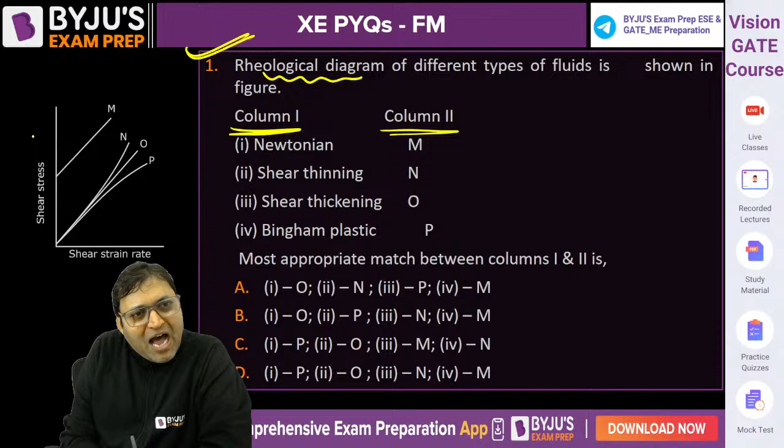There was a question asked regarding the rheological behavior of fluid. The rheological diagram of different fluids is shown in the figure. Column 1 is the type of fluid, column 2 is the graph. For Newtonian fluid, the graph is between shear stress and rate of angular deformation or strain rate, d theta by dt. For Newtonian fluid, tau is directly proportional to d theta by dt, and the slope of the curve will always be the viscosity of the fluid. Viscosity tells us whether the fluid is thick or thin - that's the thickness of the fluid. So for Newtonian fluid, since shear stress is directly proportional to rate of angular deformation, it will be a straight line. O is the Newtonian fluid.

O is Newtonian. Then shear thinning, whose slope decreases - thinning means the fluid becomes thin as viscosity decreases. So P will be the shear thinning fluid, whose viscosity or slope decreases. Shear thinning fluid is also known as pseudoplastic.

Then comes shear thickening - when the fluid becomes thick, the viscosity increases, and when viscosity increases, the slope increases. So N is shear thickening. Shear thickening fluids are also known as dilatant. And Bingham plastic is ideal plastic whose viscosity is constant, but there is a threshold shear stress required for the flow. So the order is O, P, N, M - B is the correct answer.

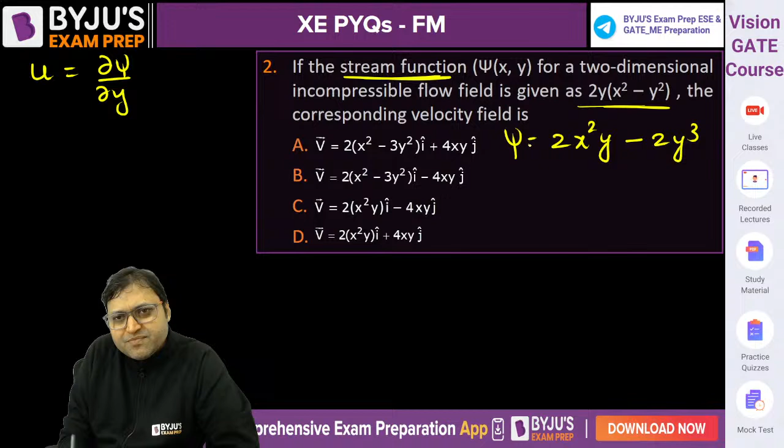If the stream function for a 2D incompressible fluid flow is given by this expression, find the corresponding velocity field. The velocity in x direction is del psi by del y. Can we write it as 2x square into y minus 2y cube? This is the expression, so del psi by del y is equal to 2x square minus 6y square.

V is equal to minus of del psi by del x, so it will be minus 4xy. That's it - find U and V. The velocity vector is equal to U i cap plus V j cap. Put the values of U and V: 2x square minus 6y square, or we can write it as 2x square minus 3y square i cap minus 4xy j cap. What is the answer?

Isn't it B again? Is it B again? B will be the answer, right? B will be the answer. Let us move to the next one.

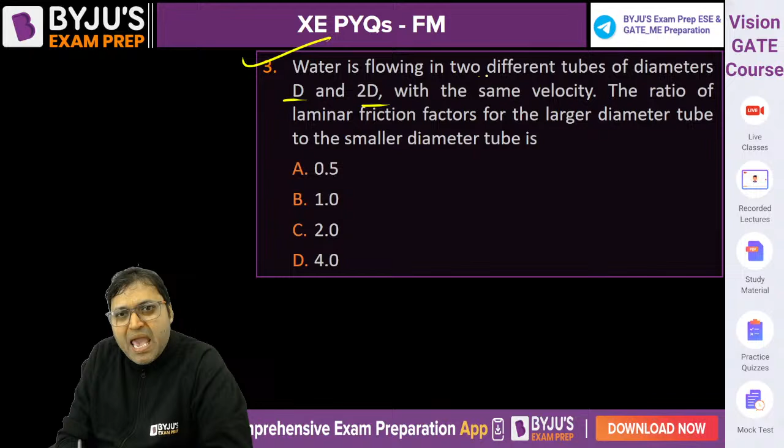Question number 3: water is flowing in two different tubes of diameter d and 2d with the same velocity. Here there is a catch - the velocity is constant, and the flow is laminar. Find the ratio of Darcy friction factor for the larger diameter tube to the smaller diameter tube. We need to develop a relation between friction factor and diameter.

For laminar flow, we know the friction factor is given by 64 by Reynolds number. And what is the Reynolds number? Reynolds number is rho into V into d by mu, or we can call it V into d by kinematic viscosity. When the velocity is constant, Reynolds number is directly proportional to diameter. So if we put it here, friction factor is inversely proportional to diameter.

That is the relation. The friction factor for the larger diameter to the smaller diameter, so F1 by F2 is equal to D2 by D1. Larger diameter is F2, this is D1, this is D2. So F2 by F1 is equal to D1 by D2, that is 1 by 2 will be the answer. It is 1 by 2, 0.5 will be the correct answer for this one, option A.

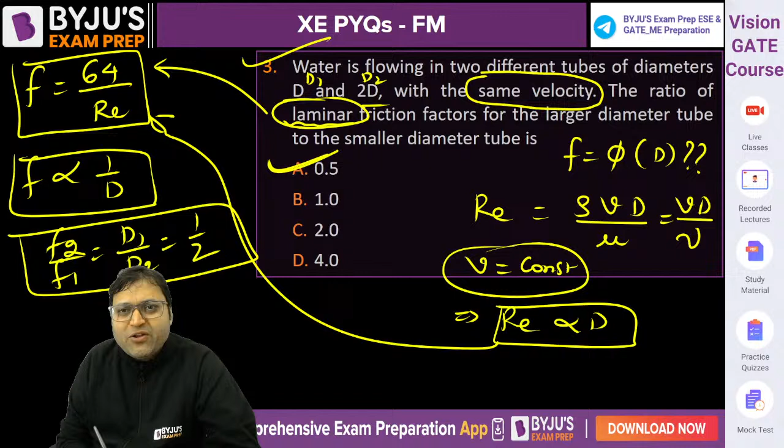If the discharge would have been constant, try to understand, if the question would have given constant discharge rather than constant velocity. If Q is equal to constant, then velocity is inversely proportional to d square. And if velocity is inversely proportional to d square, Reynolds number is directly proportional to velocity into diameter, so Reynolds number is inversely proportional to diameter. And if Reynolds number is inversely proportional to diameter, then friction factor would have been directly proportional to diameter. So in that case F2 by F1 would have been D2 by D1, so it would have been 2. If the discharge would have been constant, then the answer would have been C.

For Q is equal to constant, answer is C. For velocity is constant, answer is A. Do not commit these type of mistakes. Whenever we are supposed to develop a relation between any two parameters, the constant terms are removed from the relation. The variable terms are taken into consideration for developing the correct relation. Sometimes the velocity could have been given as constant, sometimes the discharge would have been given constant.

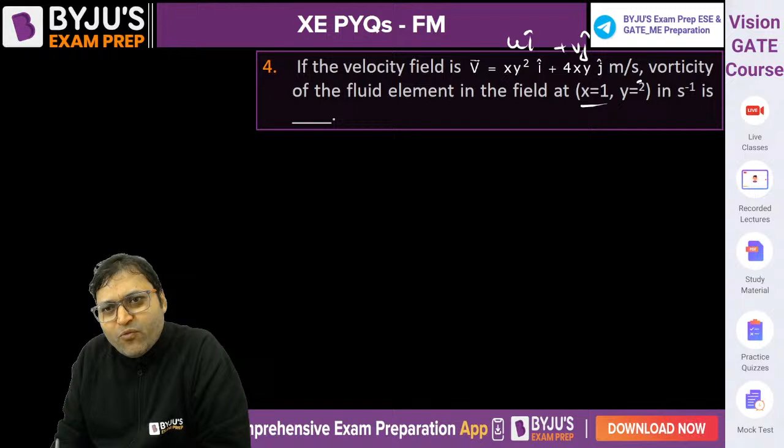The next one: if the velocity field is given by this expression, U i cap plus V j cap, find the vorticity of the fluid element in the field at x is equal to 1 and y is equal to 2. What is the vorticity about z axis? So del v by del x minus del u by del y, that will be the vorticity. What is u? x into y square. What is v? 4xy. So put the values: del v by del x is 4y, minus del u by del y which is 2xy. At x is equal to 1 and y is equal to 2, vorticity is equal to 4 into 2 minus 2 into 1 into 2, so 8 minus 4, that is 4 second inverse. The unit of vorticity is second inverse. The answer will be 4.

It will be 4, right? Isn't it 4? There is a negative sign here, there should be a negative sign.

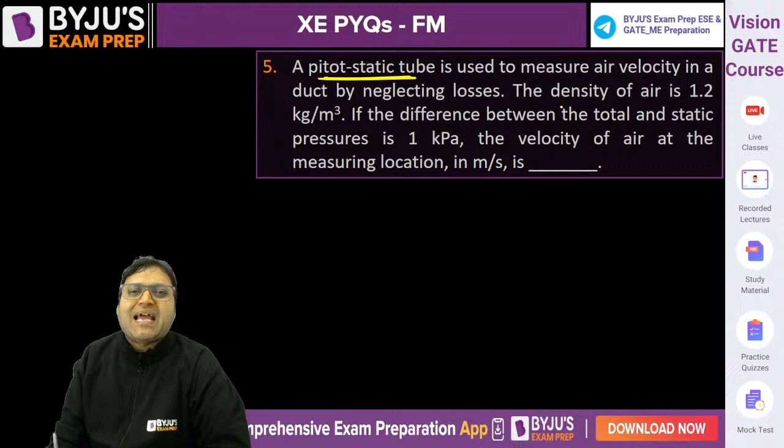Let us move to the next one. A pitot static tube is used to measure air velocity in a duct by neglecting the losses. It means coefficient of velocity will be taken as 1 and the losses are not considered. The density of air is 1.2 kg per meter cube. If the difference between the total and the static pressure - like this is the pitot tube, this is point 1, this is point 2. Point 2 is having total pressure, point 1 is having static pressure because the velocity is V1. What is the velocity of air at the measuring location?

V1 is equal to under root of 2gh, where H is P2 minus P1 by rho g. By applying the Bernoulli equation and pressure equation, we get this expression. The g and g get cancelled out. So under root of 2 into P2 minus P1, which is 1000 pascal (1 kilopascal is 1000 pascal), upon density 1.2. That is the velocity in meter per second. How much is the answer? 2000 divided by 1.2, take the square root of this. Are you getting 40.82 meter per second?

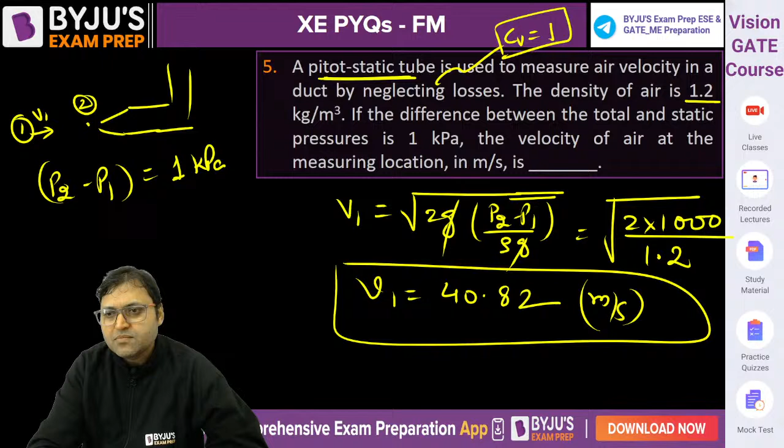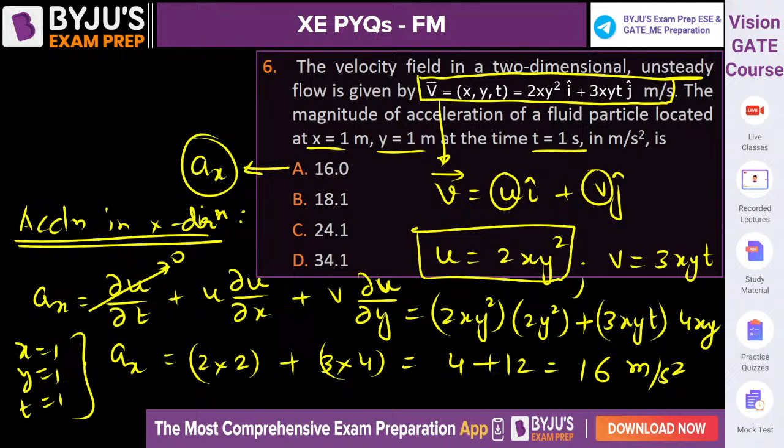Fluid machinery is not part of the engineering science syllabus. Fluid machinery will not be there. You should be happy that fluid machinery will not be there. But potential flow is there. Superposition of the potential flows, uniform flow, doublet, etc. A small topic is there, which is part of the syllabus.

Now, similarly, we can find out AY. If we compare, this is U i cap plus V j cap. So, U is equal to 2xy square and V is equal to 3xyt.

So, if we find out AY, acceleration in Y direction, calculate AY is equal to del V by del T, local acceleration, plus U into del V by del X. You should memorize the formula. Del V by del X plus V into del V by del Y.

V is a function of time, so del V by del T is 3xy, plus U, 2xy square into del V by del X, that is 3yt, plus V, that is 3xyt into del V by del Y, that is 3xt.

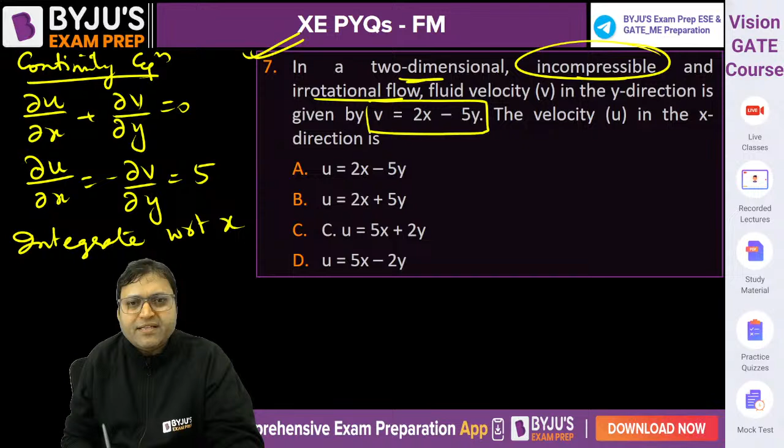Now, if we integrate this with respect to X, what do you get? Then U is equal to 5x plus a function of Y. Now, differentiate with respect to Y, then we will say del U by del Y is equal to f dash Y. This will give you the answer.

Del u by del y is f dash y. Now, to find out, this is equation number 1.

Also, the flow is irrotational. For irrotational flow,

Do you agree vorticity, that is del v by del x minus del u by del y, is equal to 0? Or we can say del u by del y is equal to del v by del x. What is del v by del x? That is 2. So this is equation number 2.

If you equate 1 and 2, from equations 1 and 2,

Which test are you talking about, Rocky?

From equation number 1 and 2.

Do you know that during the examination also you can select the sections out of the given sections, A to H, B to H? There are two sections you are supposed to select, and you can select after seeing the paper as well. Once you start solving a particular section, you can also deselect that section and select another one.

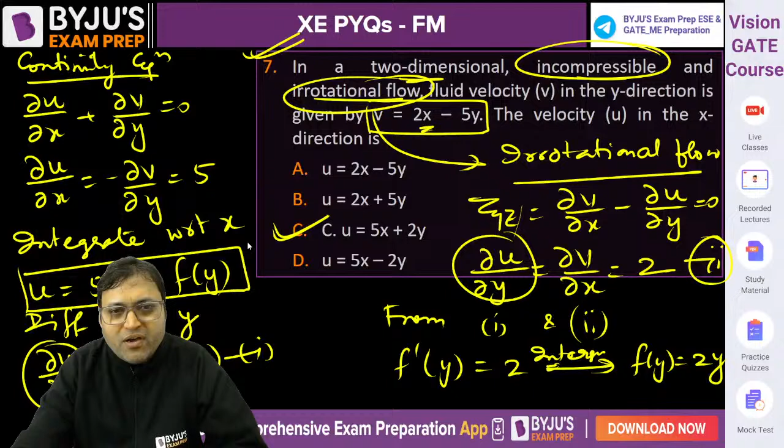Please try to revise one topic, that is potential flows. That is part of your engineering science fluid mechanics syllabus, and do not go for hydraulic machines. That is never asked in the engineering science paper. Don't revise or solve questions from hydraulic machines, but potential flow, normally theoretical questions are asked, so you do not have to worry much, but that is part of your engineering science syllabus.

The next question, let us move to the next one. Question number 8. Give it a try.

There is a water jet. The question is from the momentum equation. A water jet of 100 mm diameter, issuing out of a nozzle at a speed of 50. The diameter of the water jet is 100 mm, jet velocity is 50 meter per second. V, velocity of the jet, strikes the vane. Vane means the curved plate, and flows along it as shown in figure. This is how the fluid is flowing.

This is how the flow is flowing over the vane. The vane is attached to a cart, which is moving at a constant speed of 20 meter per second. What does that mean? It means the velocity of the vane is 20 meter per second. It means the blade is also moving. It is an example of a moving curved blade.

Whenever the blade is also moving or the plate is also moving, then we always talk about the relative velocity. We sit on the plate and write the momentum equation. I hope you remember the fact that because the flow becomes unsteady when the surface is moving or the control volume is moving, then the flow becomes unsteady. To make the flow steady, we sit on the control volume or the plate and write the momentum equation.

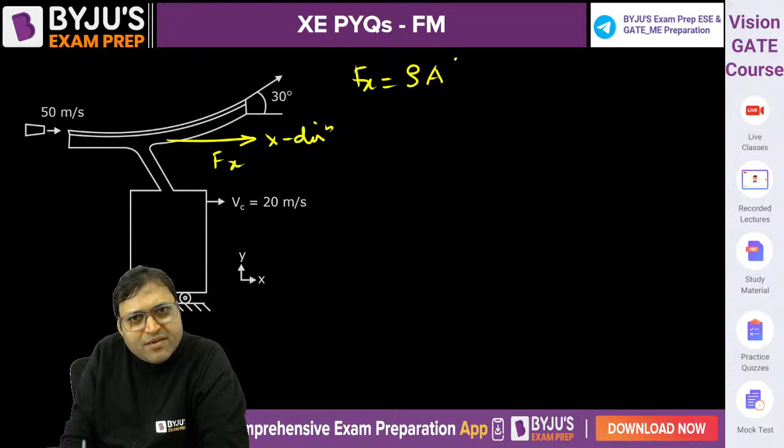density into discharge, mass flow rate rho into A into relative velocity. If you sit on this, which is moving with the velocity u, then the relative velocity of the fluid is v minus u, into force on the plate. So initial velocity minus final velocity in x direction. V minus u is the initial velocity, minus final velocity is v minus u cos 30.

This will give you the answer. It will be rho A into v minus u whole square into 1 minus cos 30. Put the values, you will get the answer. 10 to the power 3, pi by 4, d square. What is the diameter? Diameter 100 mm, 0.1 meter.

Into v minus u, 50 minus 20 whole square, into 1 minus cos 30, under root 3 by 2. What is the answer? What will be the answer? Can you solve it?

Are you getting 947 Newton something? Are you guys getting 947 Newton? Please check. Everybody please check in Newton. 1 minus root 3 by 2.

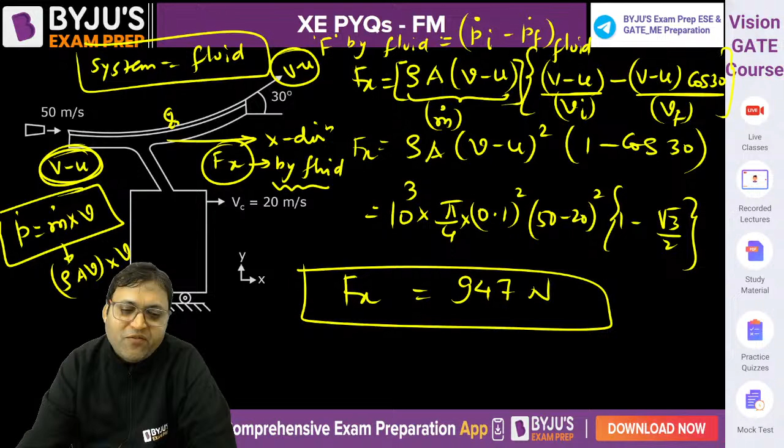Mass flow rate into change in velocity, I have written. But because the plate is moving, we consider the relative velocity, not the actual velocity. Relative velocity of the jet is V minus U, because both are moving in the same direction. If the plate were moving in the opposite direction to the flow, the relative velocity would have been V plus U.

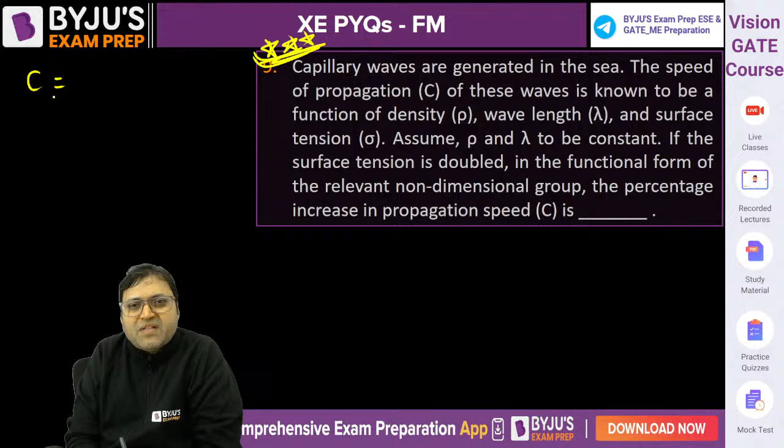The next one: capillary waves are generated in the sea. The speed of propagation of the waves, C, is known to be a function of density rho, wavelength lambda, and surface tension sigma. Assume rho and lambda to be constant. If the surface tension is doubled in the functional form of the relevant non-dimensional group, find the percentage increase in the propagation speed.

So the final speed is, let us say, C2, and initially C1, with sigma 2 becoming twice of sigma 1, that is given. So C2 minus C1 upon C1, into 100, will be the percentage change, or C2 by C1 minus 1, into 100.

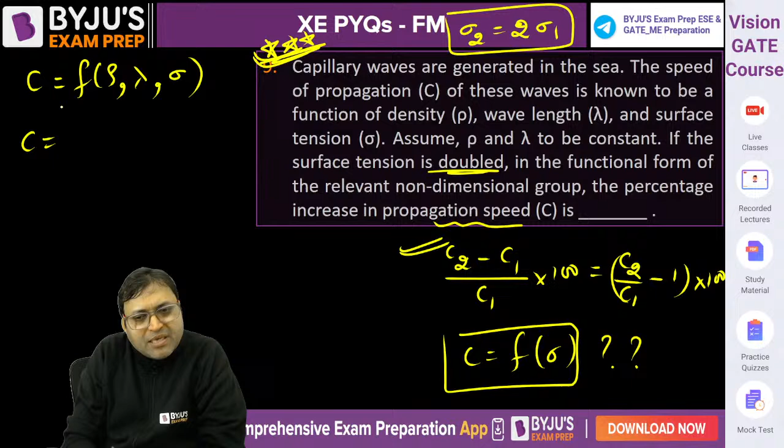So our objective is to develop a relation between C and sigma. This will give you the answer. So how to develop the relation between C and sigma? We can write C is equal to some constant into rho to the power A, lambda to the power B, and sigma to the power C.

Equate the dimensional formula. C is L1 T minus 1, meter per second, is equal to K, the constant parameter. Rho is M1 L minus 3 to the power A. Lambda is L1 to the power B. Sigma is Newton per meter, that is M1 T minus 2, the dimensional formula, to the power C.

Equate the powers on LHS and RHS. M to the power A plus C. Then L to the power minus 3A plus B. And T to the power minus 2C is equal to M0 L1 T minus 1. Now if we equate the powers, A plus C is equal to 0, one equation. Our objective is to find out this C, because both others are constant. A plus C is equal to 0, minus 3A plus B is equal to 1, and minus 2C is equal to minus 1. We are interested in this C only.

C is equal to 1 by 2. Yes or no? The value of C is equal to 1 by 2. So we can say this speed of propagation of wave is directly proportional to sigma to the power 1 by 2. That will be the relation.

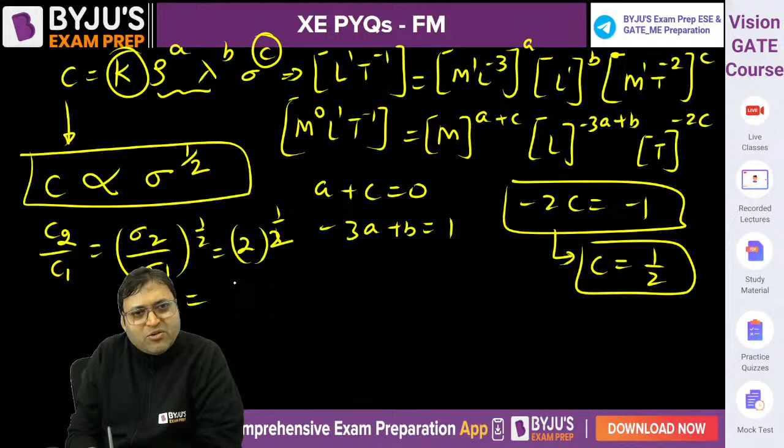So if we want to find out C2 by C1, then sigma 2 by sigma 1 to the power 1 by 2, and sigma 2 is 2, that is 2 to the power 1 by 2. What is 2 to the power 1 by 2? That is 1.414, root 2, 1.414, C2 by C1.

So if we get C2 by C1, put it in equation number 1. This is our equation number 1. Put the values in equation number 1. These type of questions are important nowadays. We will get C2 by C1 is 1.414. 1.414 minus 1 into 100, that is 41.4% will be the correct answer. It is around 41.4, which will be the right answer.

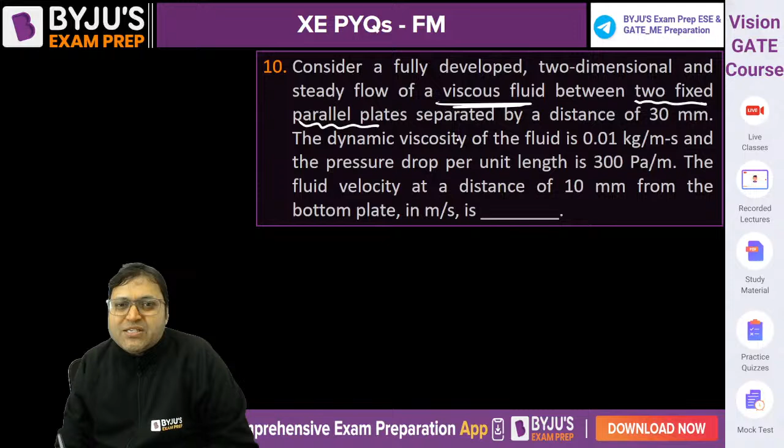Two fixed parallel plates. Revise all the formulas related to the parallel plates, separated by a distance of 30 mm. The dynamic viscosity of the fluid is given, and the pressure drop per unit length is given as 300, that is del P by del X.

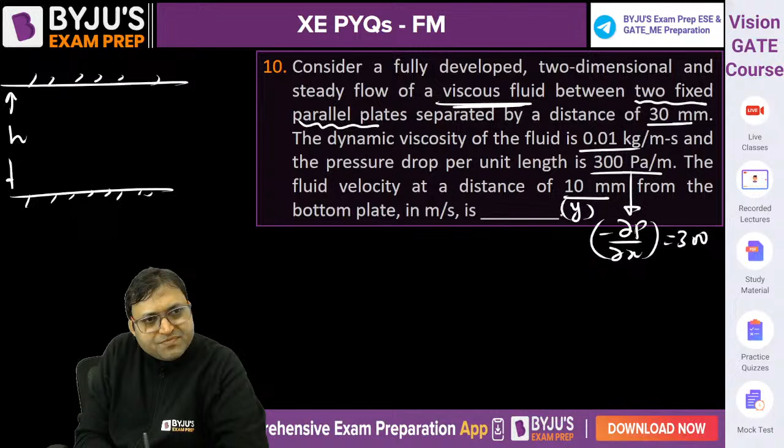300. The fluid velocity at a distance of 10 mm from the bottom plate is Y. There are two plates like this. The distance between the plates is H. This is Y is equal to 0, this is Y, this is Y is equal to H. So we need to find out.

The velocity is given by 1 by 2 mu, minus of del P by del X, into Hy minus Y square. If you remember this formula, what is the distance between them? That is H, H is given as 30. So 1 upon 2 into mu, 0.01, that is the dynamic viscosity, into 300, then Hy minus Y square.

H is 0.03, into Y, that is 10 mm, 0.01, minus Y square, 0.01 square. That will be the answer. Can you solve it?

0.03 into 0.01 minus 0.01 square, into 300, divided by 0.02. 3 will be the correct answer. The velocity is 3. The velocity is given by 3.

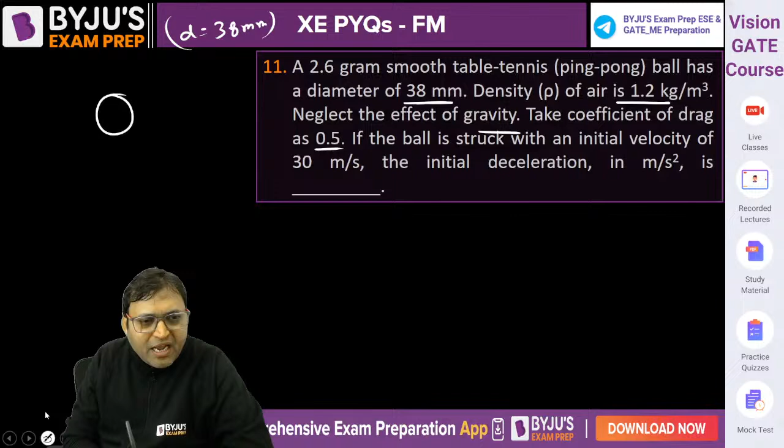Question number 11, next one. A 2.6 gram smooth table tennis ball has a diameter of 38 mm. There is a ball having a diameter of 38 millimeter, that is the diameter. Density of air is 1.2 kg per meter cube. Neglect the effect of gravity. Take coefficient of drag as 0.5, average drag coefficient. If the ball is struck with an initial velocity of 30 meter per second, that is u.

This is air, let us say. The initial deceleration is caused by a drag force acting by the air in the direction opposite to the motion. So this mass into acceleration is equal to Fd, isn't it?

That is the deceleration because it is acting in opposite direction, so acceleration is decreasing, that is the retardation. Initial velocity is u, after some time it will stop. So we can say m into a is equal to CD into projected area into rho u square by 2.

What is the mass? 2.6 gram, that is 2.6 into 10 to the power minus 3 kg into acceleration. CD is 0.5. What is the projected area? Projected area will be the area of the circle. For a sphere, the projected area will be the circle.

It is the projected area, it will not be the area of the sphere, it must be the projected area. Pi by 4 d square, the diameter is 38 mm, 0.038 square, into rho, what is the density? 1.2 divided by 2 into u square. What is the initial velocity? 30 meter per second.

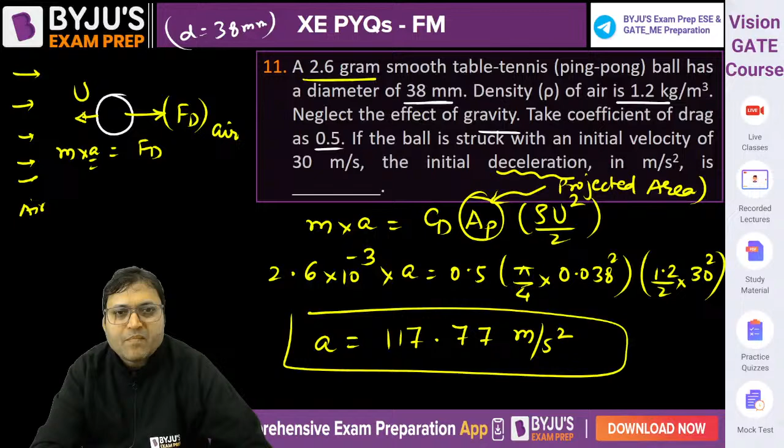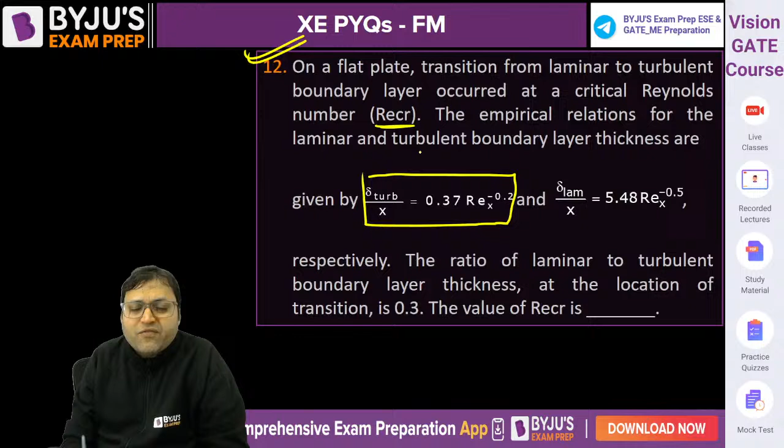The next one, over a flat plate, transition from laminar to turbulent boundary layer occurred at a critical Reynolds number. The transition of boundary from laminar to turbulent takes place at the critical value of Reynolds number. The empirical relation for the laminar and turbulent boundary layer thicknesses are given by, for turbulent this is given by this expression, that is what we know: Re to the power 1 by 5.

Rex to the power minus 0.2, that is in the denominator Re to the power 0.2, and 0.2 is 1 by 5. And for laminar it is given by this expression, that is Reynolds number to the power 1 by 2 in the denominator, right? The ratio of laminar to turbulent boundary layer thicknesses at the location of transition is 0.3.

So delta laminar to delta turbulent is given as 0.3. We need to find out the value of Reynolds number. So delta laminar, if we put the value, we will write 5.48 into Reynolds number to the power minus 0.5 upon x, and delta turbulent we can write 0.37 into Reynolds number to the power minus 0.2 upon x. X and x are getting cancelled out, so that is equal to 0.3. We can easily find out the value of Reynolds number. Can't you find out the value of Reynolds number?

5.48 upon 0.37 into 1 by Reynolds number to the power 0.3 is equal to 0.3, isn't it? Sorry, it is minus 0.2 plus 0.5, that is 0.3. So can you find out the Reynolds number? Reynolds number to the power 0.3 is equal to 5.48 upon 0.37 into 0.3.

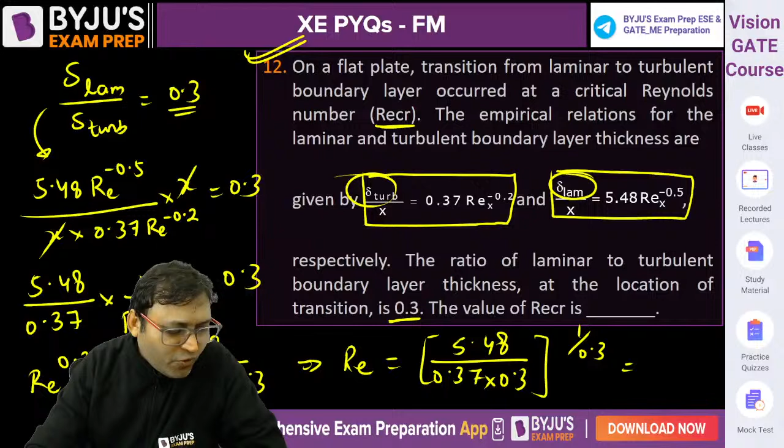The value will be 5.48 divided by 0.37 divided by 0.3, to the power 1 divided by 0.3, that is 441,426.7. That will be the value. Yes, that is correct, Aniket, that will be the answer.

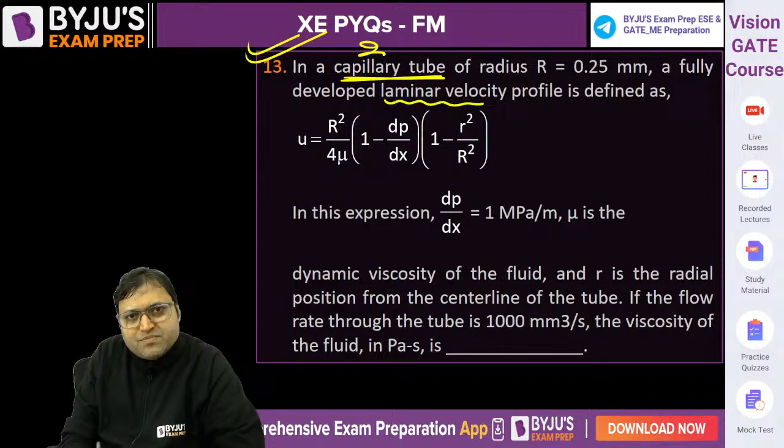The next one, question number 13, that is laminar flow in a pipe or in a tube, in the capillary tube. It is internal flow, it is an example of internal flow. In the capillary tube of radius 0.25 millimeter, a fully developed laminar velocity profile is defined. They might not have given you this.

You must remember U maximum 1 minus R square by capital R square, that is the velocity profile, parabolic velocity profile for laminar flow in a pipe, where dP by dx is given as 1 megapascal per meter. This was done a bit wrong, wasn't it?

It is not 1 minus del P by del x. Is it 1 minus del P by del x? There is a mistake. It is not 1 minus, it is minus del P by del x. Yes, it will be minus del P by del X.

This is U maximum, this is the maximum velocity. Mu is the dynamic viscosity and R is the radial position from the center line of the tube. If the flow rate through the tube is 1000 millimeter cube per second, find the viscosity of the fluid in Pascal second. It means dynamic viscosity is asked.

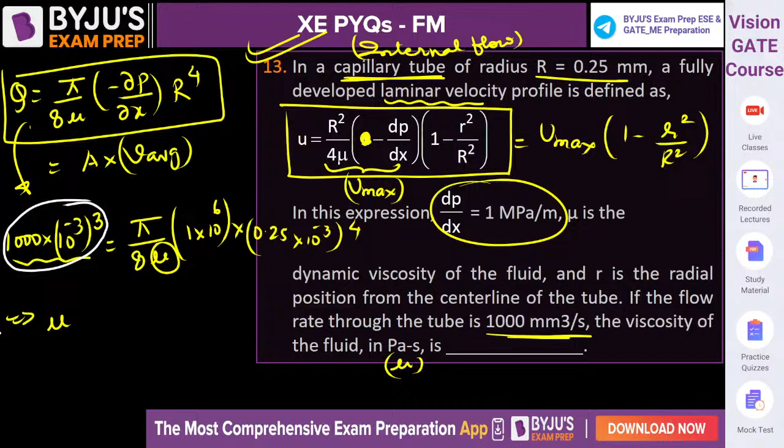Please do the calculation correctly for this term. Can we say this term is 10 to the power minus 6, and this is also 10 to the power minus 6, here also 10 to the power minus 6, so this will get cancelled out like this. So mu is equal to pi by 8 into 0.25 to the power 4. That will be your answer, Pascal second, isn't it?

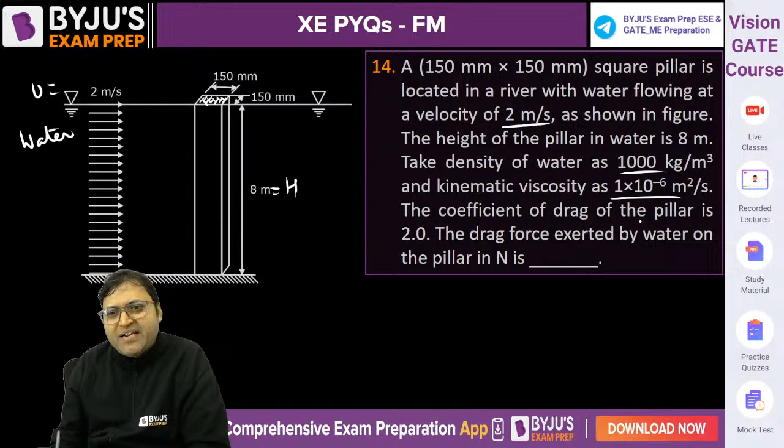A 150 by 150 square pillar is located in a river with water flowing at a velocity of 2 meter per second. The fluid is water, the height of the pillar in water is 8 meter, the density of water is 1000, kinematic viscosity is 10 to the power minus 6, and the coefficient of drag of the pillar is 2, CD. Find the drag force exerted by water on the pillar. Simple: drag force is equal to CD into the projected area into rho u square by 2.

What is the projected area? Projected area is the frontal area, this will be the projected area. So that will be 8 meter multiplied by 150 mm, that is 0.15 meter. Projected area is this. So CD, 2, into 8 into 0.15 into 10 to the power 3 into u square, that is 2 square, upon 2.

Convert 150 into meter, so 0.15. The answer you will get in Newton. So 16 into 16,000 into 0.5, sorry, 32,000 into 0.15, 4,800 will be the answer. 4,800 Newton will be the drag force.

Question number 15, the next one. I will discuss 25 questions from BYJU'S. Let us solve question number 15.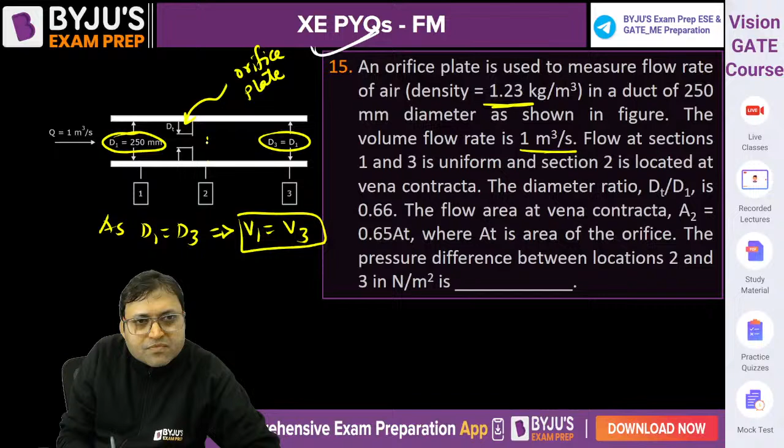According to continuity equation, flow at section 1 and 3 is uniform and section 2 is located at vena contracta. This is section 2, which is at vena contracta. This is point 2, so the fluid will be moving like this. This is how the fluid flow will take place.

The diameter ratio dt, the diameter of the orifice upon d1, is 0.66. The flow area at vena contracta, that is A2, is 0.65 AT. So A2 is equal to 0.65 AT. We can say pi by 4 d2 square is equal to 0.65 into pi by 4 dt square, because the pipe is circular. So d2 square is equal to 0.65 dt square.

Now the question is to find the pressure difference between location 2 and location 3. 2 is this point, 3 is this point. We need to find out the pressure difference between 2 and 3. So how to solve it? Apply Bernoulli equation between points 2 and 3.

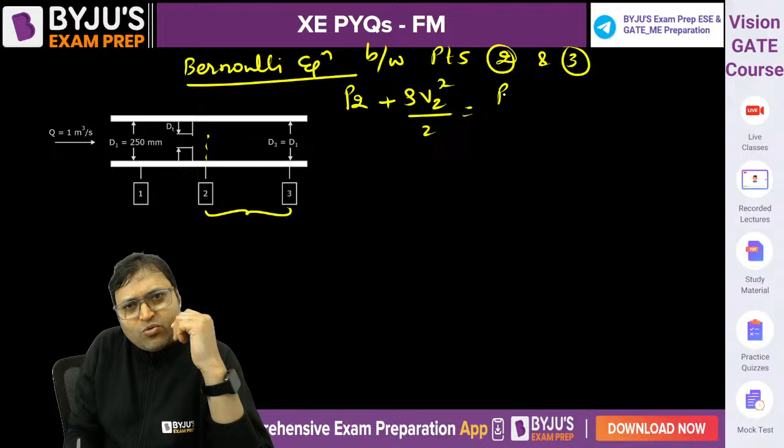We can say P2 plus rho V2 square by 2 is equal to P3 plus rho V3 square by 2, in terms of pressure. Z2 is equal to Z3, there is no change in potential energy, since they are very, very close to each other points. So the question is to find out the pressure difference between 2 and 3.

So P3 minus P2 is equal to rho by 2 into V2 square minus V3 square. And V3 can be written as V1, isn't it? V3 is equal to V1. So this becomes P3 minus P2 is equal to rho by 2 into V2 square minus V1 square.

And the flow rate is 1 meter cube per second, so we can find out the value of V1. How to find out the value of V2? If we take V1 square common, can you solve it?

If we take rho by 2 V1 square common, then it will be V2 by V1 whole square minus 1. And V2 by V1 is equal to A1 by A2. So we can write P3 minus P2 is equal to rho by 2 into V1 square, then A1 by A2 whole square minus 1.

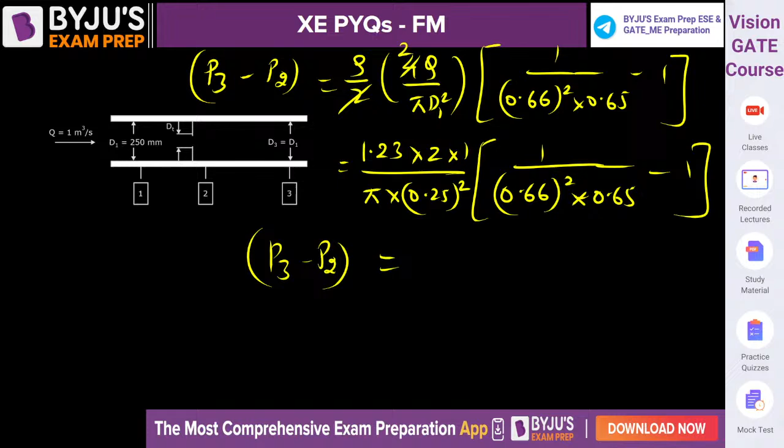There is some mistake in the question. An orifice plate is used to measure the flow rate of air in a duct of 250 mm. The volume flow rate is 1 meter cube. So from here we can find out V1. V1 is equal to 4q by pi d1 square. What is V1? 4 divided by pi divided by d1 square, 0.25 square, 20.37. V1 is 20.37.

20.37. And V3 is also same as V1 because D3 is equal to D1. Yes, and the flow rate at section 1 and 3 is uniform. dt by d1 is 0.66. So we can find out dt, this diameter.

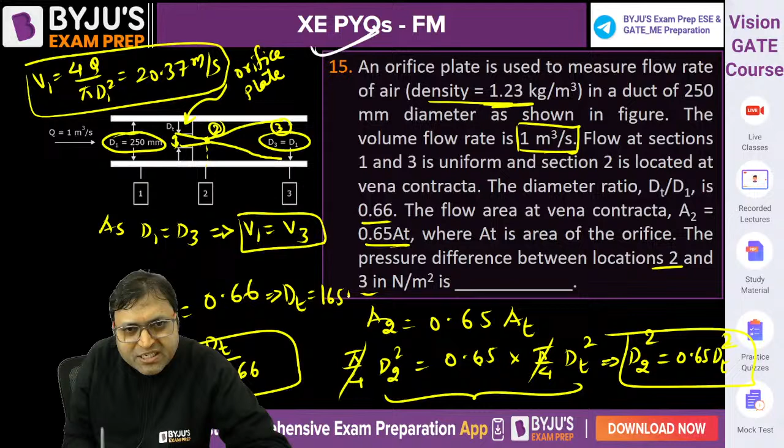We need to find out d2. How can you find out d2? d2 square is equal to 0.65 dt square. And what is dt? From here we can find dt. dt is equal to d1 into 0.66. So 0.66 into d1, 250, gives 165 mm. dt will be 165 mm.

And d2 will be equal to... a2 is equal to 0.65 at, so d2 square is 0.65 dt square. So d2 is equal to under root of 0.65 into dt, into under root of 0.65, 133.02. So d2 will be equal to 133.027. So these are the values.

So if we put the values directly here: rho by 2 into v2 square minus v1 square, rho by 2 v1 square into v2 by v1 whole square, which is a1 by a2, d1 by d2 whole square minus 1. So it will be rho by 2 v1 square.

What is the value? Rho by 2 v1 square: 1.23 divided by 2 into 20.37 square, into d1 square by d2 square minus 1. d1 square is 250 square. 250 square upon d2. What is d2? d2 had been calculated as 133.027.

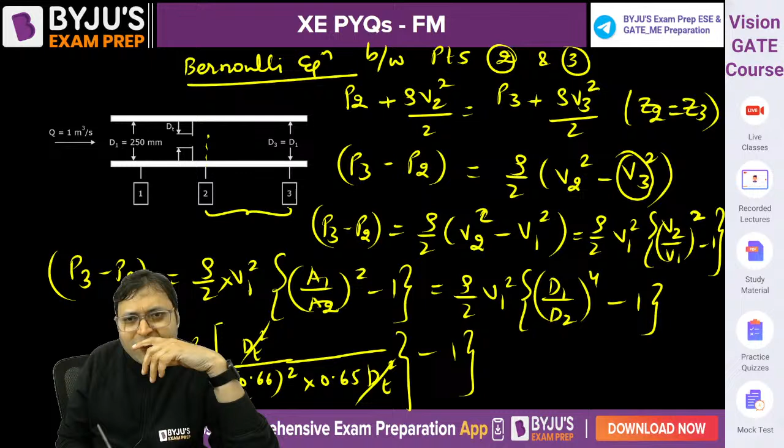V2 square minus V1 square over 2 v1 square. It should have been to the power 4. Here I had committed the mistake. It should have been the power 4, isn't it? It should have been power 4, because A1 by A2 whole square is D1 by D2 to the power 4. Are you getting it? Here also it should have been power 4.

Now what will be the answer? It should have been power 4. Yes or no? No need to write this, just calculate D1 and D2 to the power 4. Now what will be the answer? 250 divided by 133.027 to the power 4, minus 1, into 1.23 into 20.37 square divided by 2.

2927.9, it is around 2928 Newton per meter square will be the answer. The final answer, the correct answer will be 2928. Yes, that is correct, it is around 2928. That will be the answer.

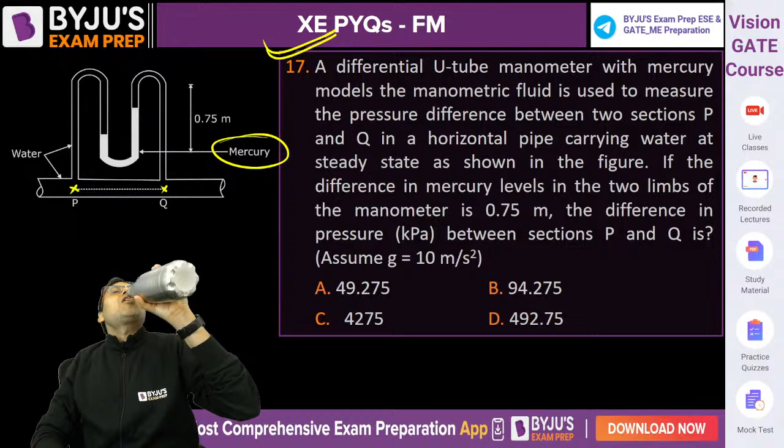If the difference in mercury level is given as 0.75, the difference in mercury level is, this is 0.7, this is 0.75.

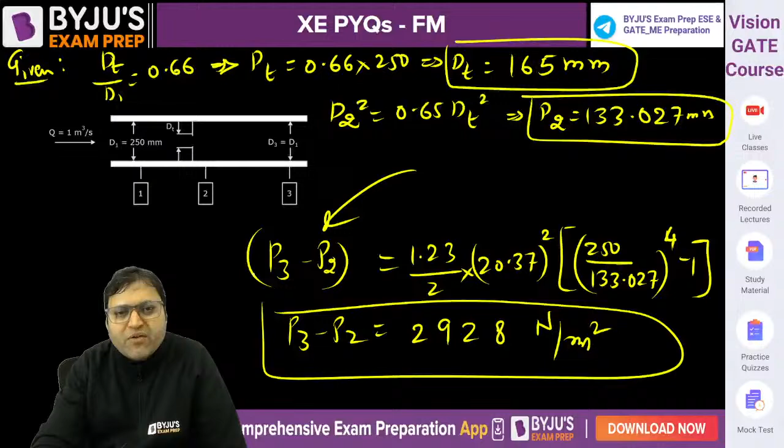That is an incorrect answer. The answer given is incorrect. The correct answer should be 2927, 2928.

Next question: we need to find the difference in pressure in kilopascal between section P and Q. Assume acceleration due to gravity is 10 meter per second square. So find out the pressure difference in kilopascal.

So if we write the pressure equation, can you write it? Start from point P, PP. Then we are moving in the upward direction up to this height. Let me call this height H.

PP minus, density of water. We will write the pressure equation in kilopascal only. So PP is the pressure at point P in kilopascal, minus rho of water, which is 1000 kg per meter cube, but we need it in kilopascal so divide by 1000. So that's G, that is 10 into H.

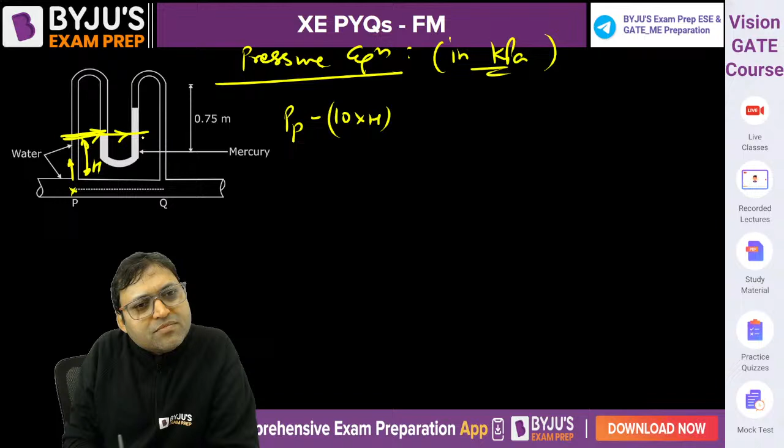Then we can jump from here to here, then again from here to here. We are here, then again moving upward, minus rho GH, 13.6 into G into 0.75.

We are here, now traveling downward, plus, and we are traveling in water. Then 1 into 10 into 0.75 plus H is equal to PQ. This is the pressure equation, equal to PQ.

So this minus 10 into H will get cancelled out with the 10 into H. So PP minus PQ will be equal to, can you find out the value of PP minus PQ?

So it will be 10 into 0.75, negative both, so it will be 13.6 into 0.75 into 10. So 13.6 into 7.5 minus 7.5 kilopascal, which is 12.6 into 7.5 kilopascal.

That gives 94.5. So it is 94.5. The nearest option will be treated as correct, so B will be the correct answer. It should exactly be 94.5 kilopascal, not 94.275.

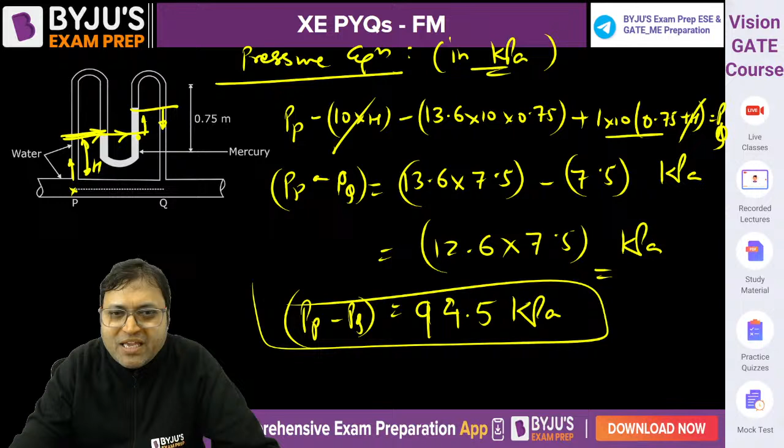I don't know why they have not given it exactly as that. If we take G as 9.81, it will also not create a problem.

The next one, question number 18. A 20 centimeter cubical box slides on oil of a certain mass density over a large plane surface with a steady velocity. The plane surface is inclined at an angle of 30 degree. Beautiful question. There is a cubical box sliding over it, with oil between them. The side of the cubical box is 20 centimeter and the velocity is 0.4 meter per second.

The plane surface is inclined with the horizontal plane. The oil film between the block and the plane surface is 0.4 millimeter, that is H, thickness of the fluid. The weight of the cubical box is 64 Newton, and weight always acts in the downward direction.

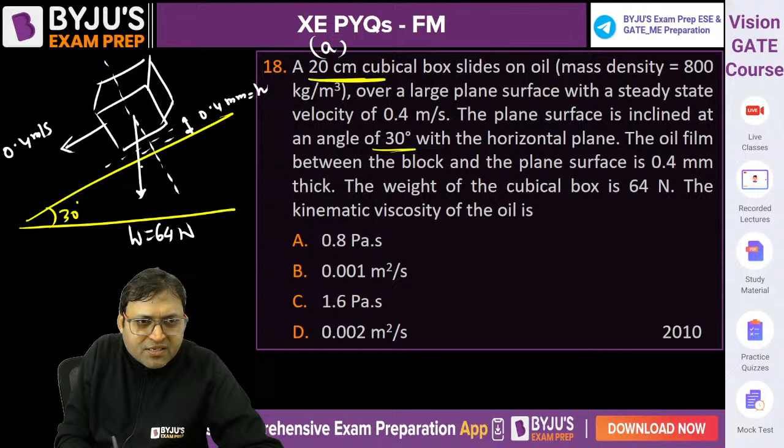If we take the normal to this inclined surface, this will be 30 degree. So this is W cos 30, that is Fn, the normal force. We are interested in the tangential force, Ft, which will be equal to W sin 30.

The kinematic viscosity of the oil is to be found. So we can write Newton's law of viscosity: tau, the tangential force per unit shear area, is equal to mu into V by H. Assume the velocity profile to be linear. So the question is to find mu, which equals Ft into H upon As into V.

And kinematic viscosity is mu by rho, so multiply by 1 by rho, and that will give the answer. So Ft will be equal to W sin 30, where W is 64. So mu is equal to...

W sin 30, 64 sin 30 is 1 by 2, into H which is 0.4 into 10 to the power minus 3, upon shear area. Shear area is the contact area, that is 20 centimeter by 20 centimeter, 0.2 into 0.2, into area into velocity. What is the velocity? 0.4, into density. Density of oil is 800.

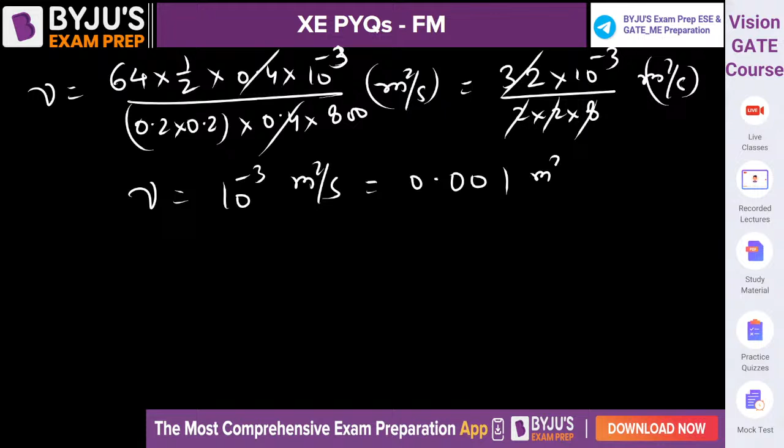B is the answer, B will be the answer. Yes, it will be 64 sin 30. B will be the correct answer for this one, right? Kinematic viscosity is what is asked.

What will be the dynamic viscosity? It is kinematic viscosity into density. So 0.001 into, if the question asks you to find the dynamic viscosity, dynamic viscosity equals kinematic viscosity into density, so 0.001 into 800.

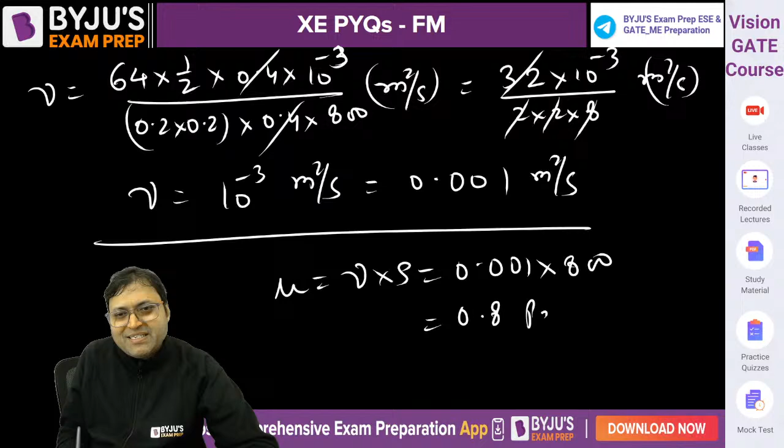0.8 Pascal second. So if the question asks you to find out the viscosity, it could have been an MSQ. 0.8 Pascal second is dynamic viscosity, and this is kinematic viscosity. Both are correct - one is for dynamic viscosity, another is for kinematic viscosity. But the question is about kinematic viscosity, that is why option B is correct.

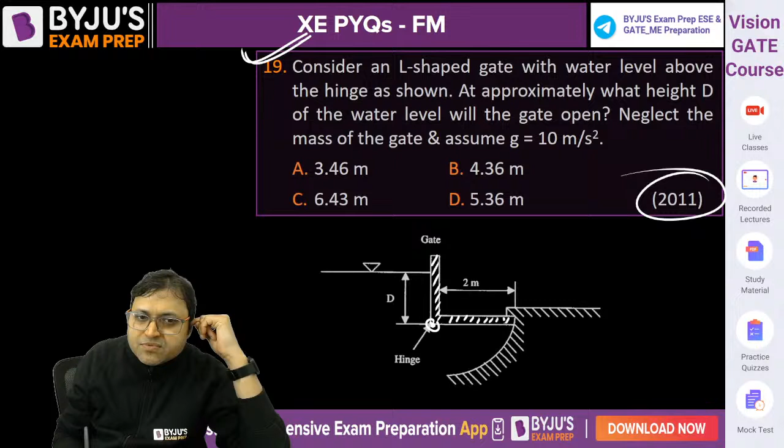Question number 19, this type of question I had discussed in the class also, asked in 2011. Consider an L-shaped gate - this is the L-shaped gate, with water level above the hinge as shown. This is the hinge, the gate is free to rotate about the hinge, with water level above the hinge as shown. Approximately what height D of the water level will the gate open? Neglect the mass of the gate and assume G as 10 meter per second square. What is the value of D?

What we discussed in the class - this is H, this is B. So I had developed the relation between B and H, so that the gate is about to open. H is equal to under root of 3B, if you remember. So it means D is equal to under root of 3 into, this is L let us say, 2. So that will be the answer.

Root 3 into 2 equals 3.646 - sorry, 3.464. 3.464 meter, A is the answer. A will be the answer. But how will A be the answer? Do you remember how I solved it?

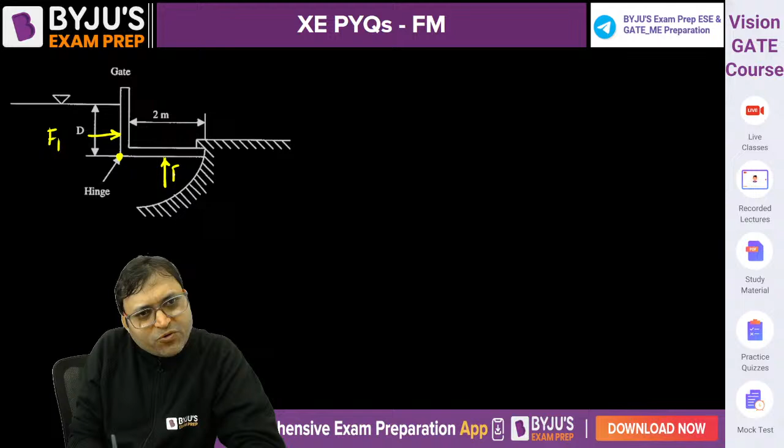Look at the forces which will develop the moment about the hinge - we need to equate the moment. So there is a force F1 and there is a force F2. F1 is providing the clockwise moment, F2 is providing the anti-clockwise moment.

So what is F1? F1 is equal to rho into G into area. Area is equal to D into 1 into X bar. X bar is equal to D by 2. And this F1 will pass through CP, so this is 2D by 3, so this is D by 3. This distance is D by 3 - isn't it D by 3? Because it will pass through CP.

So what about F2? F2 is equal to rho into G into area, area is 2 into 1. This 1 into X bar, or into D, because the depth of the centroid from the free surface is X bar. Rho G into area into X bar. And this distance will be 2 by 2, that is equal to 1.

So for equilibrium, moment about the hinge must be zero - for rotational equilibrium, net moment must be zero. So we can say F1 into D by 3 should be equal to F2 into 1. Put the values, rho G getting cancelled out. Rho into G into it will be D square by 2 into D by 3, equal to - if I call it as L, let me keep it as L into 1. Let me keep it as L into 1 into D, and this is L by 2, so let me call it as L by 2.

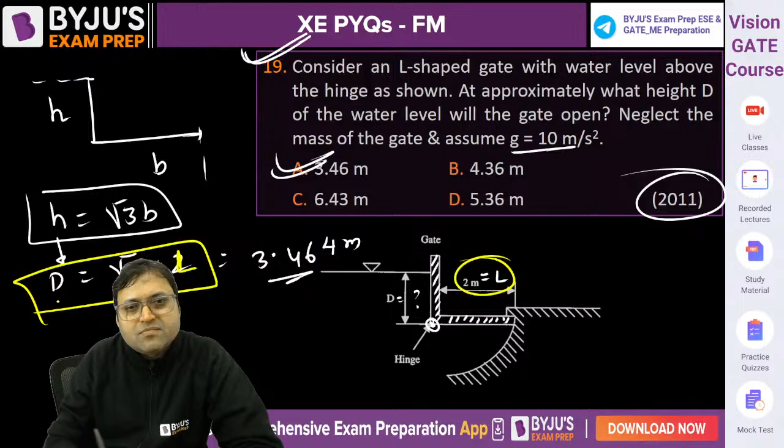So the correct answer will be the next one. Common data question 20 and 21: a vessel containing water - there is a vessel which is containing water and oil. Another fluid is oil, density is 800, pressurized by the gas. The gas pressure above the oil is 2 bar, as shown in the figure. Assume that the gravitational acceleration is 10. The pressure exerted on the bottom - the pressure at the bottom inside the vessel will be approximately, in bar. So here there is the 2 bar pressure.

Divide by 10 to the power 5. Rho into G 8000 into 1, so it will be 0.08, plus 1000 into 1 to 3, this is 3 meter. Or let me write this way: 2 bar means 2 into 10 to the power 5, plus rho of oil 800 into G into 1 meter, plus rho of water into G into 3 meter, that is Pascal.

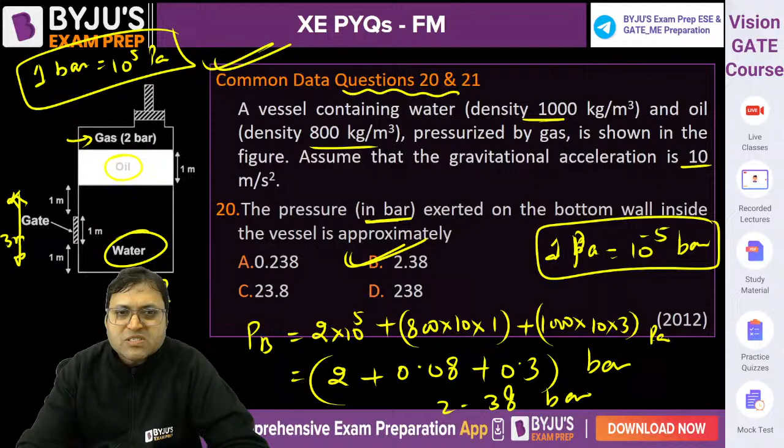1 Pascal is equal to 10 to the power minus 5 bar. So if you want to convert, multiply by 10 to the power minus 5. So 2 plus 0.08, plus 0.3 bar. So 2.38 bar will be the correct answer. Isn't it 2.38 bar? It is 2.38 bar. B will be the answer.

Now the gate is 1 meter wide, perpendicular to the plane of the paper. The force exerted on the gate is approximately the force which is exerted on the gate. We can call it average pressure into area, because the pressure varies linearly. Pressure is a linear function of Z. So we can find the average pressure as P minimum plus P maximum by 2.

So average pressure is here. The bottom pressure we already know. So average pressure on the gate will be equal to PB minus rho of water into G into 1 plus 0.5. That will be the average pressure. Average pressure into area. So what is the average pressure? It will be, the answer should be in Newton, right?

So it will be 2.38 into 10 to the power 5, minus 10 to the power 4 into 1.5 Pascal, multiplied by area 1 into 1. So force is equal to average pressure into 1 into 1. So it will be in terms of 10 to the power 4. If we take 10 to the power 4 common, then it will be 23.8 minus 1.5 Newton. What is 23.8 minus 1.5? 22.3. 22.3 into 10 to the power 4 Newton.

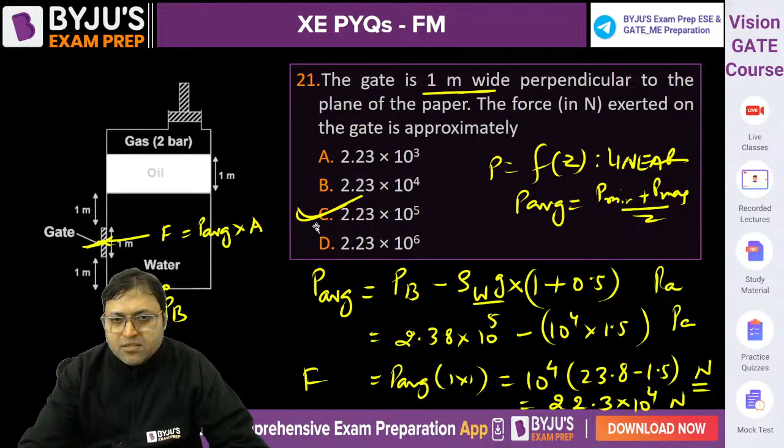22.3 into 10 to the power 4, or 2.23 into 10 to the power 5 Newton will be the correct answer. Isn't it C? 2.23 into 10 to the power 5 Newton will be the right answer. C will be the answer.

The next one, question number 22. Let us talk about question number 22. There is a dam with a curved shape shown in the figure. This is the dam. The cross-sectional area of the dam, which is the shaded portion, is 100 meter square. The area is 100 here.

And its centroid is at x is equal to 10 meter. Where is it shown? Its centroid is at x is equal to 10 meter. This is the centroid, that is 10 meter. X bar is 10 meter. This is the centroid. It is at x equal to 10 meter.

The vertical component of the hydrostatic force Fz will be downward because the fluid is in contact from the top. The vertical component of the hydrostatic force Fz is acting at a distance xp. This is actually xp, this is xp. The value of xp is, so how to find the value of xp? Equate moment, this is xp. If we equate moment about the free surface, about this OZ, if we equate moment about OZ...

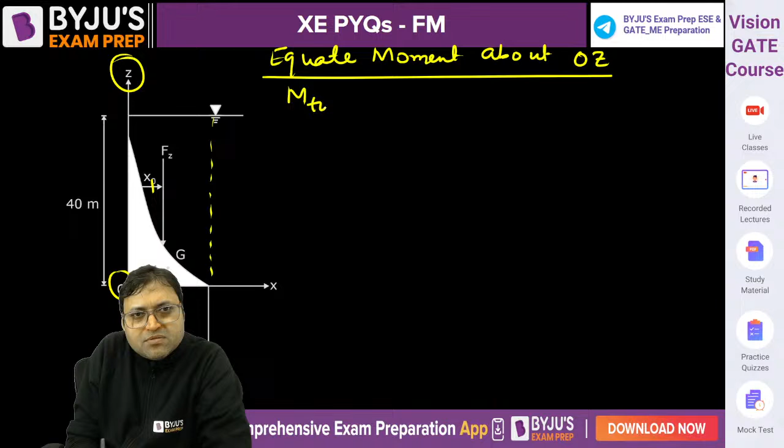the total moment is equal to the sum of moments m1 and m2. What is the total moment? If we take this total, area into width is 1, let us say. What is the area? 15 by 40, 40 by 15, that is the total area, into the centroid of this 15, which is equal to 7.5, yes or no?

Into 7.5, we are taking the moment about OZ, equal to m1. Let me take m1 as this is 1, this is 2. So m1 will be area 100 into this is 10, plus this area will be 40 into 15 minus 100. This will be the remaining area into xp, because the vertical component of hydrostatic force is the weight of the fluid which can be contained by the curved surface up to the free surface.

So into xp, from here we can find the value of xp, isn't it? 600 into 7.5 is equal to 1000 plus 600 minus 100, 500 into xp. That will give you the value of xp. These two zeros get cancelled out. So xp is equal to 6 into 7.5 minus 10, divided by 5 meter. 7.5 into 6 is 45, minus 10 is 35, divided by 5, is 7 meter will be the answer. Do you understand? Equate moment about the free surface.

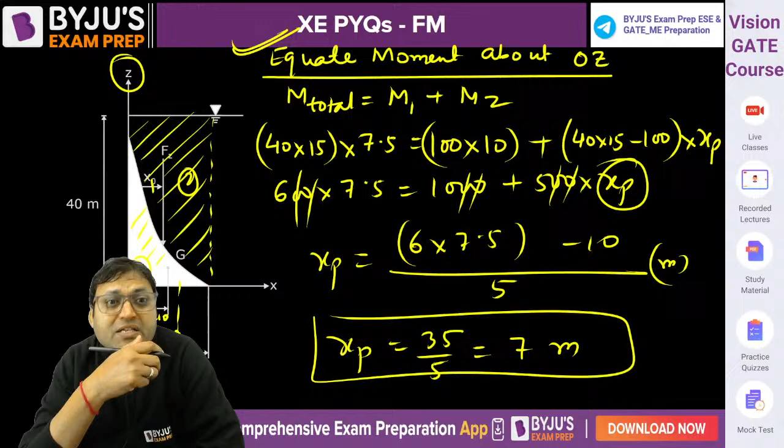What is the value of force? Can you find out the force? Fz is equal to rho of water.

Fz will be equal to, the fluid is not given, let me assume it as water. Rho of water into G into this volume. How to find out this volume? This volume is 40 into 15 minus 100. So it will be...

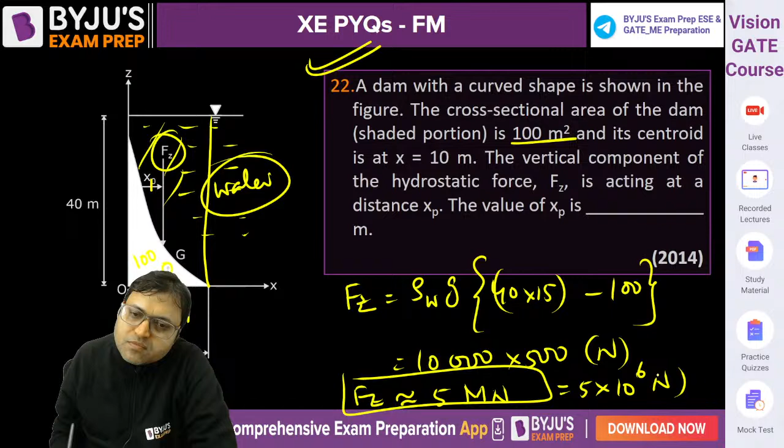10,000 into 500 Newton, it is almost this Newton, it is around 5 mega Newton. The force will be around 5 mega Newton if the fluid is water, that is 5 into 10 to the power 6 Newton. This will be the answer. This question was asked in 2014. It is around 5 mega Newton, close to 5 mega Newton.

Let us talk about the next one. A container of a square cross section. There is a container of a square cross section like this.

Is partially filled with the liquid of density rho 1, there is the liquid which is having the density rho 1. The cylinder or the container is intended to float in another liquid of density rho 2. Outside fluid is rho 2, inside fluid is rho 1.

As shown in figure, the distance between metacenter and center of buoyancy is given by I by V, where I and V submerged are the moment of inertia of the cross section and the submerged volume. Neglect the weight of the container. Which of the following is the correct condition for stability? What is the condition for stability?

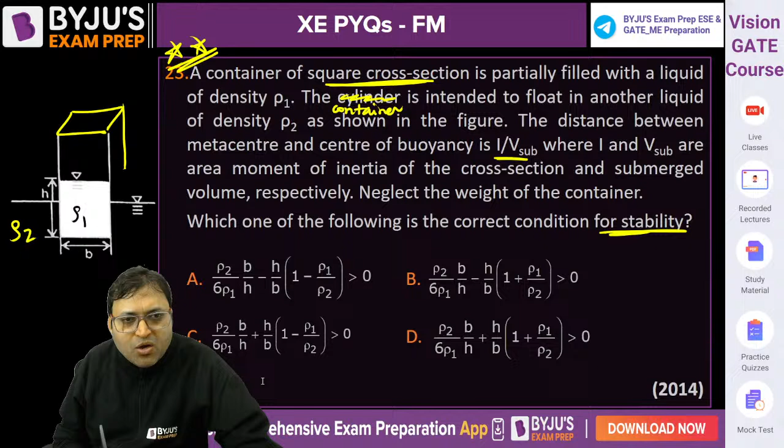For stable equilibrium, we can say Gm metacentric height, that is Bm minus Bg, should be positive. For stable equilibrium, metacentric height should be positive. So first of all, we will find out, this is H. We will find out the depth of immersion X. First of all, find out this X.

X is the depth of immersion. How? For vertical equilibrium, buoyant force exerted on the container is equal to weight of the fluid in the container. What is the buoyant force? The fluid is rho 2 here, this is rho 1. So buoyant force is exerted by rho 2 into G into volume of the fluid displaced. If this is B, this is B, this will also be B. So rho into G into volume of the fluid displaced. So B square into X is equal to the weight of the fluid in the container, rho 1 into G into volume of the fluid in the container, that is B square into H. B square getting cancelled out, G and G also getting cancelled out. So X will be equal to rho 1 H by rho 2.

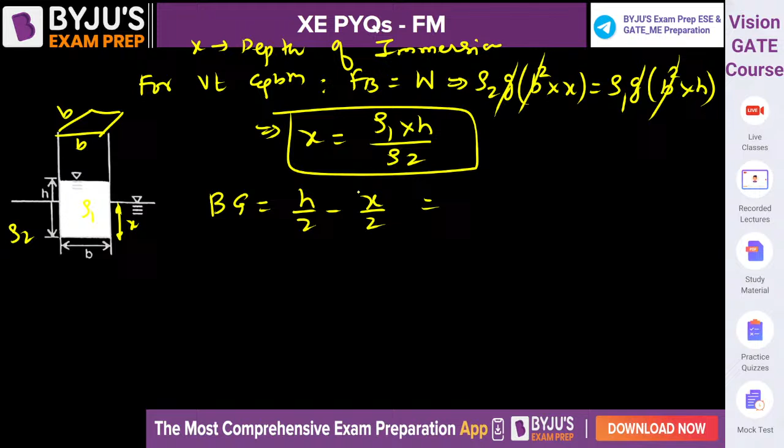X is equal to rho 1 H by rho 2, that is the first expression. Now what is Bg? Bg is equal to H by 2 minus X by 2. And X is equal to rho 1 H by rho 2, into 1 by 2. So it will be H by 2 multiplied by 1 minus rho 1 by rho 2. That is Bg. Now Bm is equal to I xx upon volume of the fluid displaced. What is I? B to the power 4 upon 12, and volume of the fluid displaced is B square into X.

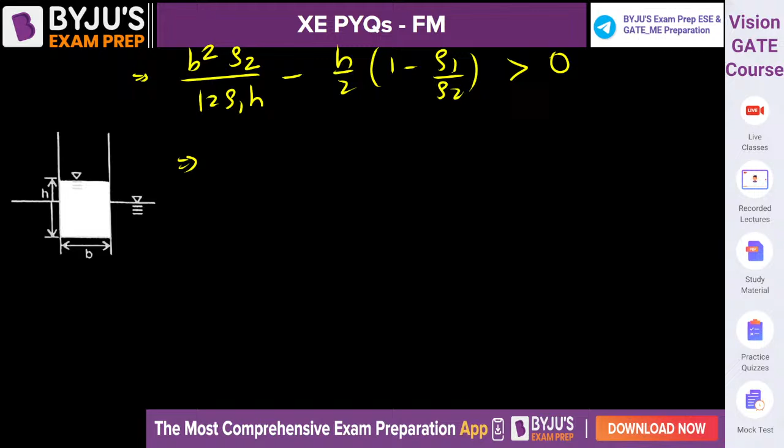So it will be B square by 12 into rho 1 H by rho 2, that is Bm. So for a stable equilibrium, Bm minus Bg should be greater than 0. What is Bm? B square into rho 2 by 12 rho 1 H minus H by 2, 1 minus rho 1 by rho 2, should be greater than 0. If we take B by 2 common, here, if you see the options, it will be B by 6 something. So if we take B by 2 common, then it will be rho 2 B upon 6 rho 1 H minus B by 2 common. If we take B by 2, so it will be 2 by B into H by 2, 1 minus rho 1 by rho 2, greater than 0. This 2 getting cancelled out. So if we take B by 2 on the right hand side, it will be rho 2 into B upon 6 rho 1 into H minus H by B, 1 minus rho 1 by rho 2, should be greater than 0. That will be the condition. A will be the correct answer. Option A will be the answer.

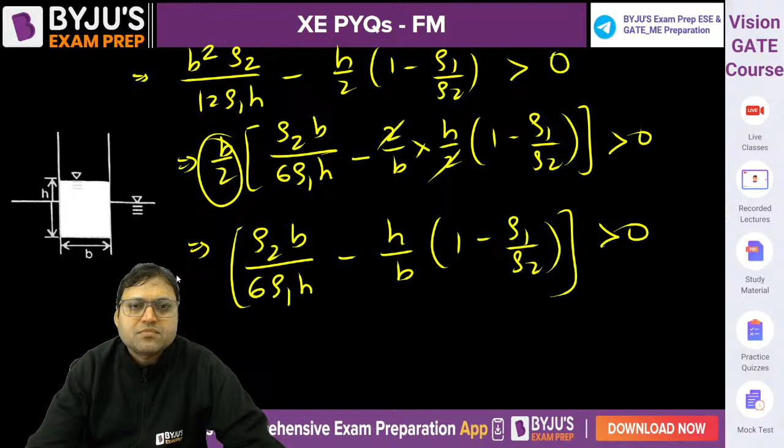Are you getting it? Question number 24.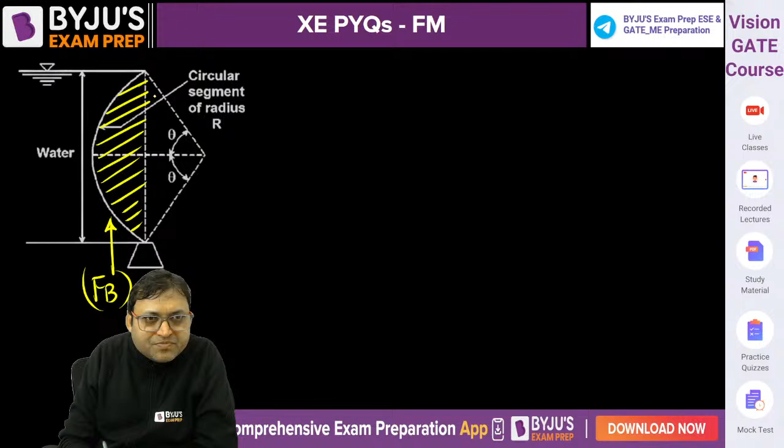If we complete it, this is a circle. It is a circle like this. So if we can first find out this volume, width is 1. So this volume will be equal to,

2 theta upon 2 pi into pi r square, that is 2 theta by 360 upon pi r square. This is the area into 1. This will be the volume of the fluid displaced.

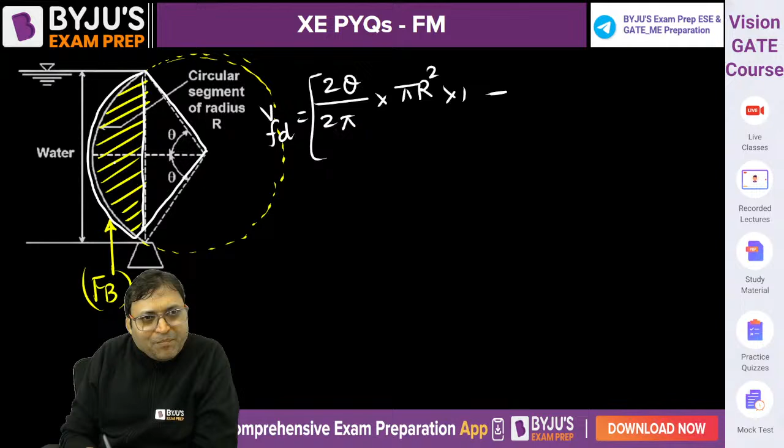This minus, if we can find out the volume of this triangle, so what will be the base of the triangle? It is r cos theta. The height of the triangle will be r cos theta, this will be r sin theta, and it will be twice. This is also r sin theta.

So if we want to find out the volume of the triangle, then half into base is 2r sin theta into height is r cos theta into 1. We are interested in volume. This is how volume of the fluid displaced is equal to this, with the 2 getting cancelled out, and pi also getting cancelled out.

So theta into r square minus 1 by 2 into r square. Then 2 sin theta cos theta is equal to sin 2 theta. That is the volume, which equals, if we take r square common, then theta minus sin 2 theta by 2. That is the volume of the fluid displaced.

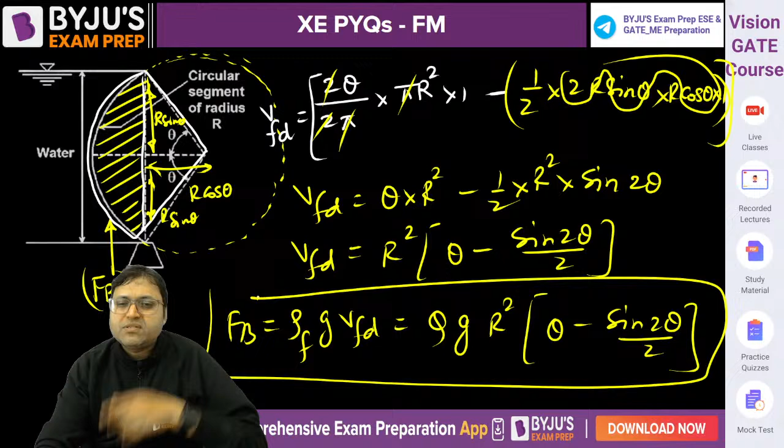Buoyant force is equal to rho of fluid into g into volume of the fluid displaced. Density of water is given as rho, so the buoyant force is rho into g into r square into theta minus sin 2 theta by 2. That will be the answer. Option A will be the correct answer.

Well done. The next question, number 25, asked in 2015. An open glass capillary tube of 2 mm bore, the diameter is 2 mm, is lowered into a cistern containing mercury, density 13,600, as shown in figure.

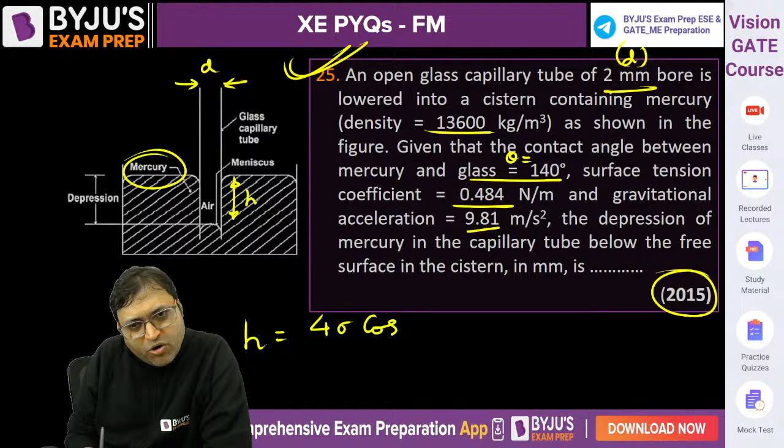Given that the contact angle between the mercury and glass is 140 degrees, that is theta, which is greater than 90 degrees, so there will be capillary depression. Surface tension coefficient sigma is 0.484, and the gravitational acceleration is 9.81. The depression of mercury in the capillary tube below the free surface, H, is calculated by 4 sigma cos theta upon rho into G into D.

If we are getting it as positive when theta is less than 90 degrees, then there will be capillary rise. If we are getting this value as negative when theta is greater than 90 degrees, then capillary fall. So there will be capillary fall because cos theta will be negative, but the magnitude can be calculated.

So can you calculate the magnitude? H is equal to 4 into sigma, 4 into sigma is 0.484, into cos of 140. You will get a negative answer, no problem with that because depression is asked, so do not take the negative sign. Rho of fluid is 13,600 into G is 9.81 into diameter 2 mm, that is 0.002.

That will be in meter. So H will come out to be cos of 140 into 4 into 0.484, divide by 13,600, divide by 9.81, divide by 0.002. That gives 5.558 into 10 to the power minus 3 meter, which is negative. So the value will be negative. In millimeter, that will be 5.558. That will be the answer.

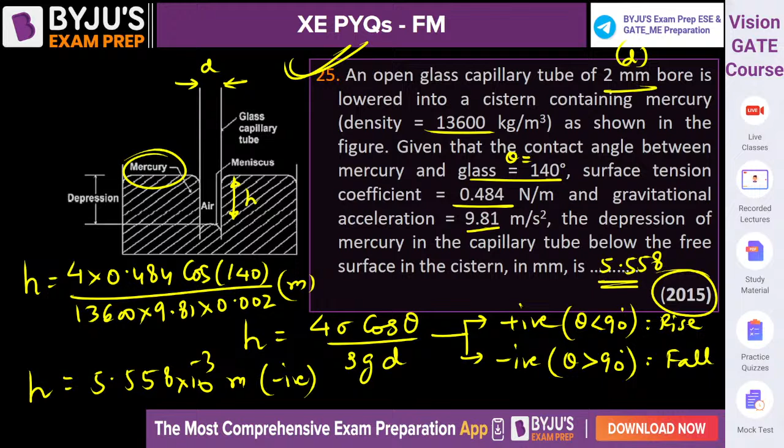One more question, this is again a wonderful question. Consider incompressible flow through a two-dimensional open channel. At a certain section AA, the velocity profile is parabolic, U is a function of y. This is y and this is the parabola. Neglecting air resistance at the free surface, find the volume flow rate per unit width.

Because U is a variable, at any y we will calculate the discharge, the volume flow rate. Q is equal to integration of U into dy into 1, isn't it? And the limit will be from 0 to 2, y is equal to 2. The only problem is...

We need to develop a relation between U and y. Now if you see this curve, if the velocity profile is like this, then U square is equal to ay. If the parabola is like this, that means y square is equal to 4ax. If the parabola is like this, then it will be x square is equal to 4ay. In x direction velocity is there and in y direction is y. So it will be u, because this is the curve, so u square is equal to ay.

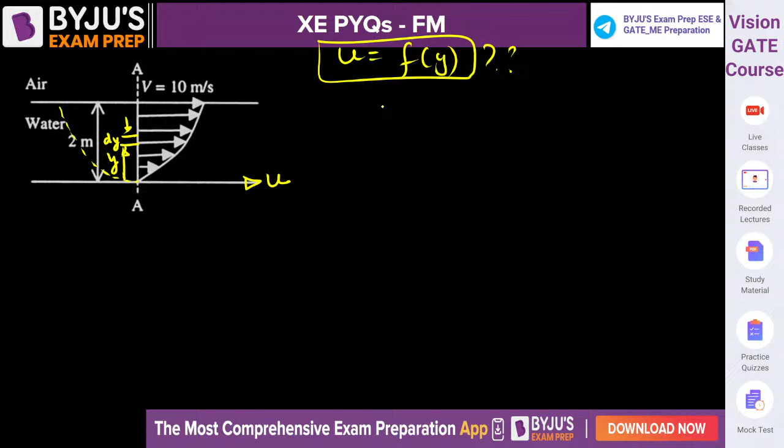Here you can say y is always positive, y is not negative, the curve is like this. So u square is equal to ay plus b is our assumption, this is our expression. Assume u square is equal to ay plus b, that is the parabolic relation, that is the general parabolic relation. So at y is equal to 0, u is equal to 0, implies b is equal to 0. At y is equal to 2, u is equal to 10, implies a will be equal to 50. So u square is equal to 50y is the expression, or you can say u is equal to under root of 50y. This is our expression, root 50y.

Now q is equal to integration 0 to 2, u is equal to under root of 50 into root y into dy. Do the calculation, root 50 is outside. What is the under root of y dy? 1 by 2 plus 1 is 3 by 2, so y to the power 3 by 2 into 2 by 3, from 0 to 2. So it will be q is equal to under root of 50 into 2 by 3 into 2 to the power 3 by 2, that is 1.5. This will give you the answer.

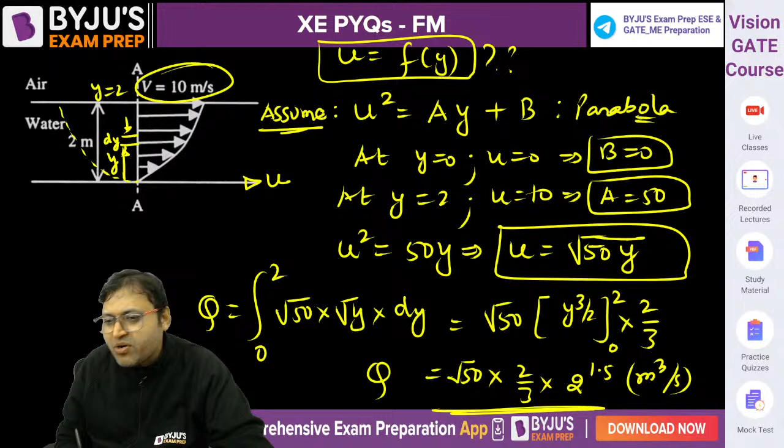Can you solve it? Under root of 50 into 2 by 3 into 2 to the power 1.5, 13.33 will be the answer. The answer will be 13.33. The parabola is given, na? It is given by the parabola.

The velocity profile is given as parabolic. That is why 13.33 will be the correct answer.

One last question before we end our session. Common data question: the velocity field for a two-dimensional flow is given as u i cap plus v j cap. What is the total acceleration? Total acceleration equals ax i cap plus ay j cap. You can easily find out, so find out the total acceleration.

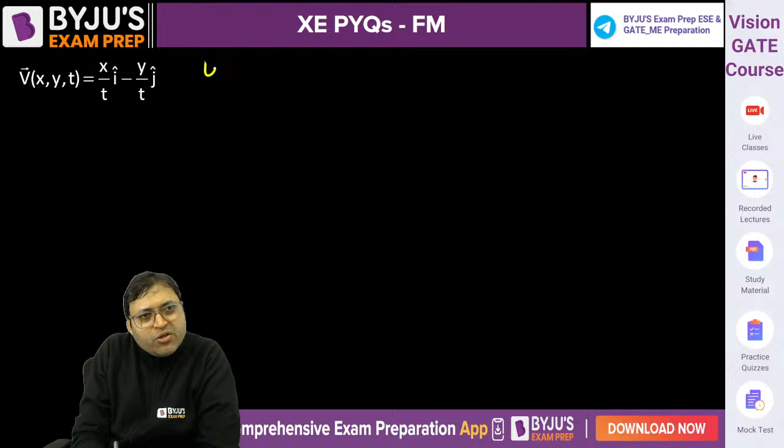U is equal to x by t and v is equal to minus y by t. So ax is equal to del u by del t plus u into del u by del x plus v into del u by del y. Del u by del t is differentiating x into minus 1 into t to the power minus 2.

Plus u into del u by del x. U is x by t, and del u by del x is 1 by t. V into del u by del y: u is not a function of y, so this will be 0. So it will be minus x by t square plus x by t square. So ax will be equal to 0. Here ax will be 0.

You can find out Ay also. Del V by del T, the local acceleration, plus U into del V by del X, plus V into del V by del Y. Because V is not a function of X, this will be 0. Del V by del T is minus Y into minus 1 into T to the power minus 2, plus V, minus Y by T, into del V by del Y, minus 1 by T.

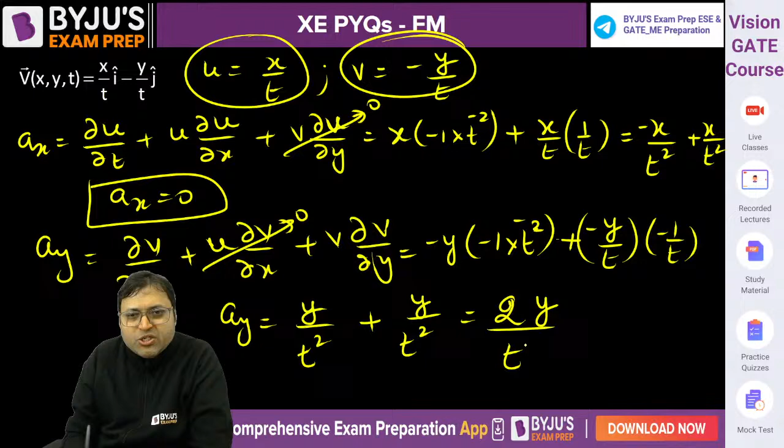So Ay will be equal to Y by T square plus Y by T square. So Ay is equal to 2Y by T square. So the answer will be 2Y by T square into J cap. That will be the answer.

And the given velocity field is incompressible and irrotational. So for the continuity equation, apply del U by del X plus del V by del Y. If it is 0, then it is incompressible. What is del U by del X? 1 by T. What is del V by del Y? Minus 1 by T. Because it is 0, it is incompressible.

And for irrotational, vorticity: del V by del X minus del U by del Y is equal to 0. What is del V by del X? V is not a function of X, so it is 0 minus 0, which is equal to 0. So it is irrotational also.

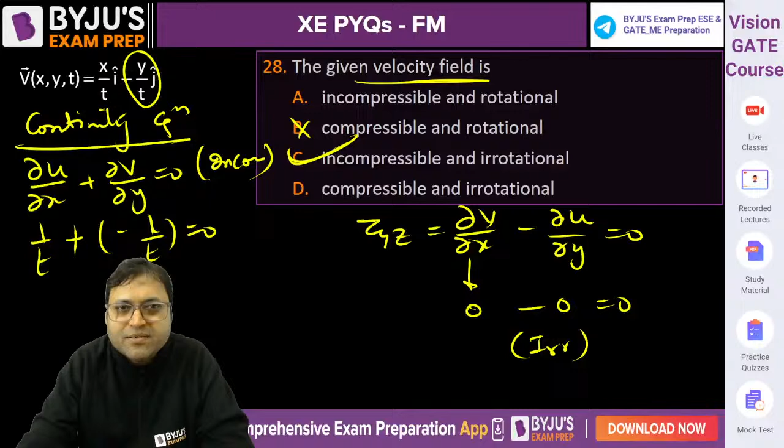It is irrotational as well as incompressible, right? So I am giving you one assignment question. Try to solve this question, and if you find any difficulty, you can ask. The question is very much similar to the question I have discussed just now. Try to solve this and share your answer through the comment section, or share it on my Telegram channel.